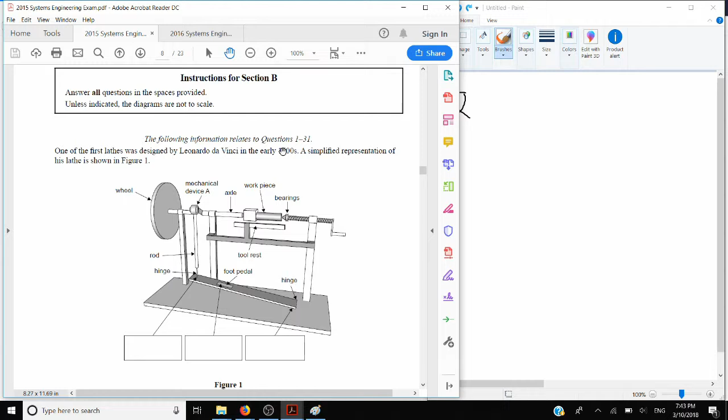It's pretty well labeled and it's reasonably clear. So what's it asking us? In the boxes provided in figure 1, label the effort, fulcrum, and the load on the foot pedal.

Okay, so here's our foot pedal. We've got the foot pedal connected to this crank, which is connected to our axle. A lathe, if you don't know, is a device for spinning a job, and you can use a tool to remove material from the job, that would be a piece of wood or a piece of metal or whatever you like.

So what do we got? We've got this hinge connected to a linkage connected to our crank. That's going to turn our axle. So that's going to be our load because that's the work we want done.

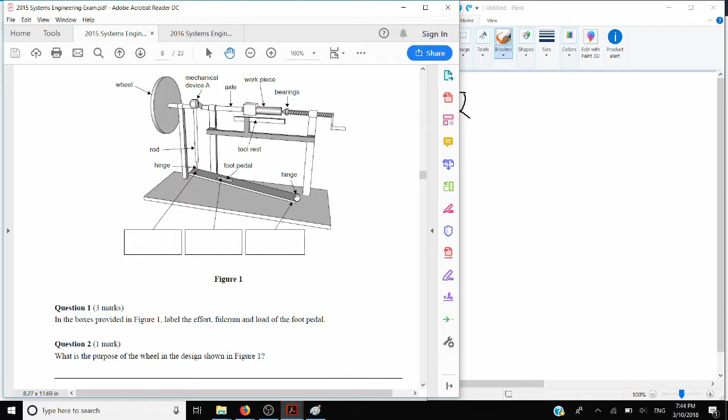I imagine this is where you put your foot, because it says foot pedal. So that's you putting in some power, that's our effort. And so what we've got left is the fulcrum, which is the point at which this, because it's a lever, is going to pivot.

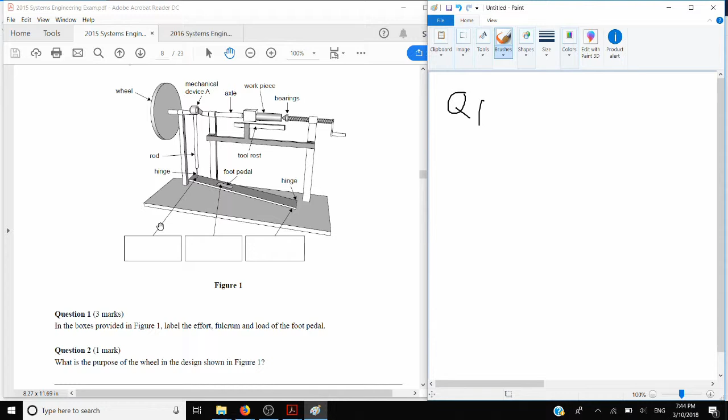So question 1, we have load, effort, fulcrum. Grand. Question 2.

What's the purpose of the wheel in the design shown in figure 1? Okay, so we've got this big wheel that is attached to our axle. And what is it for?

Well, if you've got a wheel and it weighs anything and it starts rotating, it's going to have some momentum and it's going to want to keep rotating. And we call that a flywheel. So if you said it's a flywheel, that would be fine. But if you didn't know it was a flywheel, if you said something like the wheel has momentum and helps keep the axle turning, that would be fine too, because think about this situation.

You can only put force into this crank and turn this axle on the downstroke. There's an upstroke where you can't put any force in unless you sort of hook your foot underneath the foot pedal and lift it up, which seems really silly. So you need the momentum of this big wheel to keep the thing turning. So any answer that encapsulates that is fine.

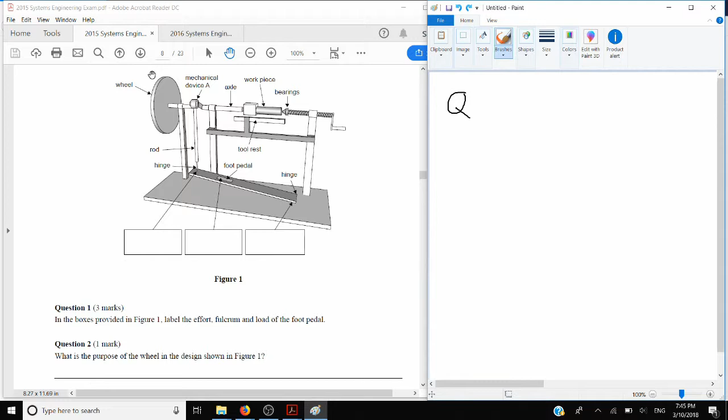Question 3, the type of motion for each of the following. Okay, so the wheel is rotational motion, and the foot pedal goes up and down and up and down, so that's oscillating. So that was question 3, rotational and oscillating.

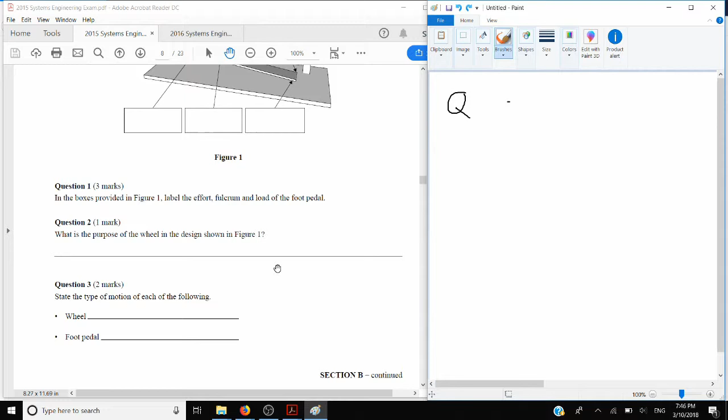Question 4, name the device labeled mechanical device A in figure 2. Okay, mechanical device A, it is connected to an axle, it comes off at an angle, and it helps you turn an axle, so it is a crank. It's got this linkage here that turns your oscillating motion into rotational motion. It's a crank. That was question 4, crank.

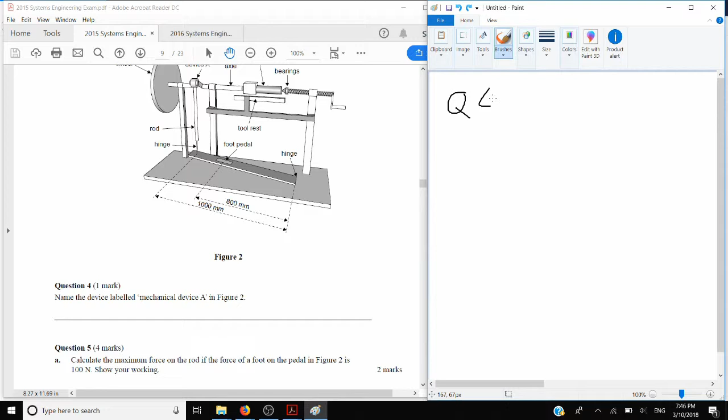Right, question 5. Calculate the maximum force on the rod if the force of a foot on the pedal in figure 2 is 100 newtons. Show your working.

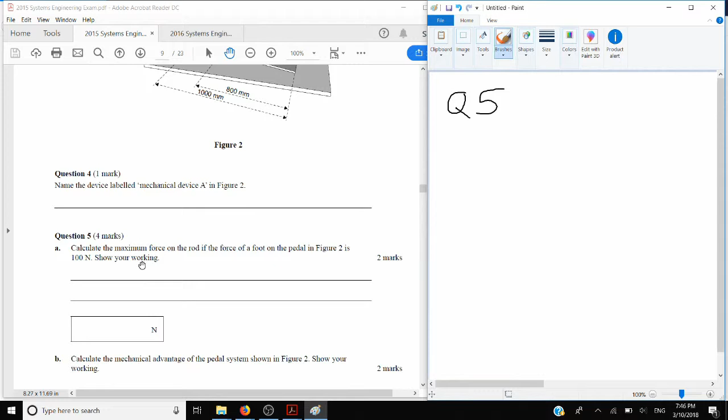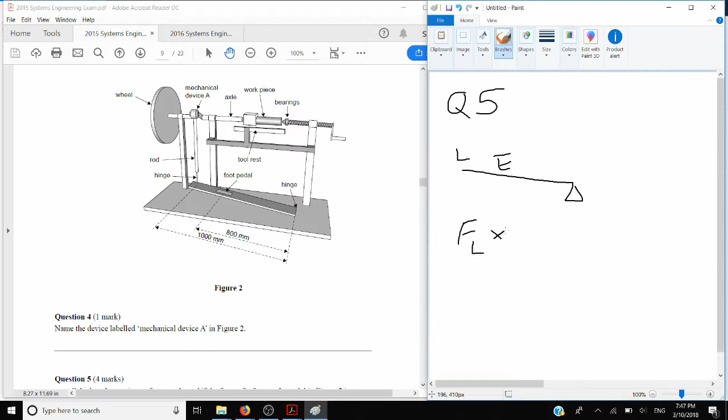Okay, I like this. So we've got a lever, and let's just draw out what's going on with our lever. So we've got our fulcrum there, we've got our load here, we've got our effort over here, and when we're working with a lever, we know that the force of our load times the distance to our load is equal to the force of our effort times the distance from our effort.

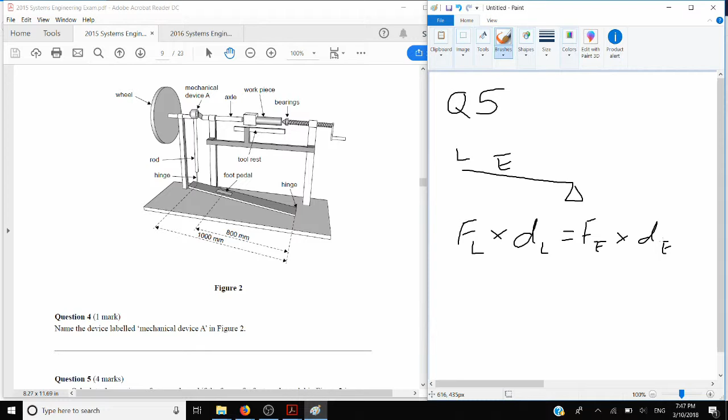So what do we have? We have the force of the effort is 100 newtons. We know the distance here is 800 millimeters from the fulcrum to the effort, we know that the distance from the fulcrum to the load is 1000 millimeters or a meter. So the only thing we don't know is the force of the load.

So we need to reorganize this equation so we have the force of the load on its own, and then we can solve it. So divide both sides by the distance to the load. You can cancel out the distance to the load, and then you can rewrite your equation as: force of the load equals force of the effort times distance to the effort over the distance to the load.

Now, one thing I'm always banging on about is anytime you're working with measurements, convert them to meters. It'll just make your life so much easier. So the force of the effort we know is 100 newtons. Multiply that by 800 millimeters, which is, let me rewrite this so that it's a little bit neater, 100 newtons times 800 millimeters rather is 0.8 meters.

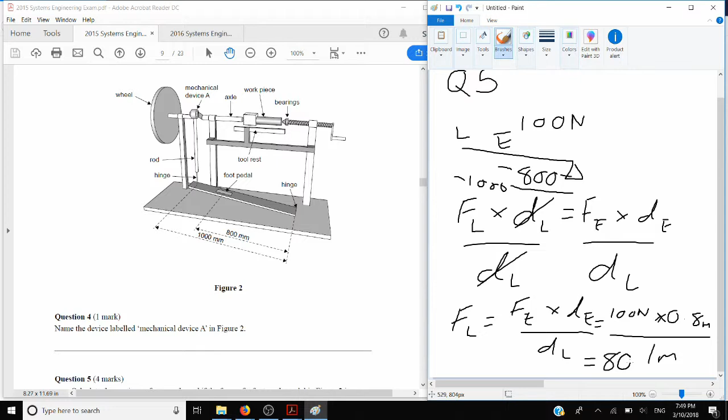And that gets divided by 1,000 millimeters, which is 1 meter. So that's super easy, right? Because anything you divide by 1 is just itself. So what's 100 newtons multiplied by 0.8? It is 80 newtons. And if you were to divide 80 newtons by 1, you would find it's still 80 newtons. So that's your answer for question 5 is 80 newtons.

Question 5b. Calculate the mechanical advantage of the pedal system shown in figure 2. Show your working. Okay, so let's draw this one out. We've got what is actually just a lever. So we've got a fulcrum. We've got our effort where our foot would go, and we have our load at the end where we're doing some work. And we've got some distances.

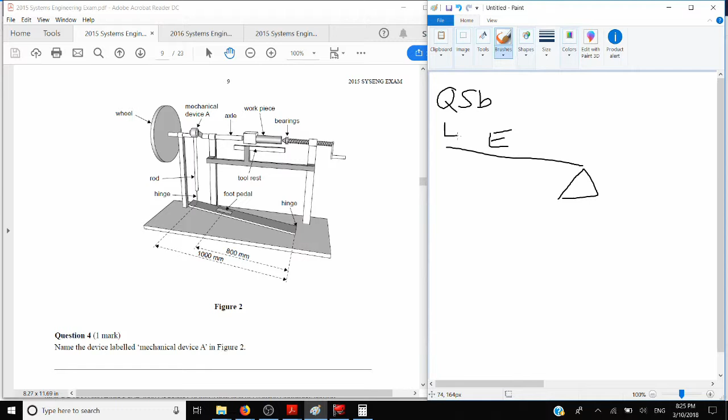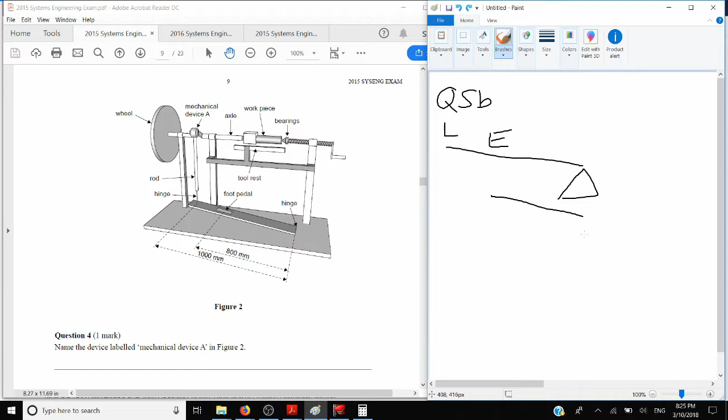So we know that from the fulcrum to the effort is 800 millimeters. And 800 millimeters, I always encourage you to work in meters. So 800 millimeters, well, there's 1,000 millimeters in a meter, so 800 millimeters is 0.8 meters. And the distance from our fulcrum to our load is 1,000 millimeters, which is just 1 meter.

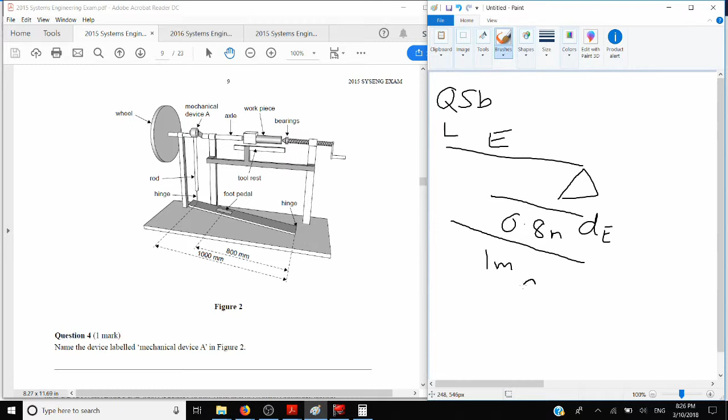So we know this is distance of our effort, this is distance of our load, and we also know force of our effort, which is our foot. Force of our effort is 100 newtons. And we don't know force of our load. But we can find that.

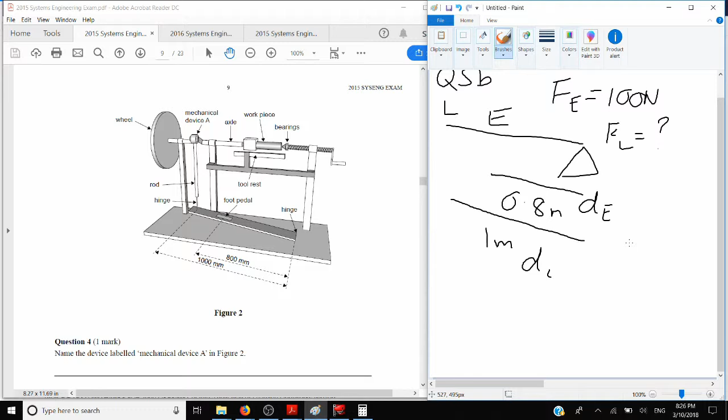And we can find that using our formula, because we know that the force of our load times the distance of our load is equal to the force of our effort multiplied by the distance of our effort. And we want to get the force of the load all on its own so we can find out what it is. So we divide both sides by the force of our load.

No, we don't. We divide them by the distance of our load. And we find that we can cancel out the distance of the load on that side, which gives us the equation. Running out of space, so I'm just going to move this along a little bit.

Force of our load is equal to force of our effort times distance of our effort over the distance of our load. And so now we can just put in our values. So we remember that the force of our effort is 100 newtons. The distance of our effort is 0.8 meters. And the distance of our load was 1 meter.

So what does that work out to? Well, 100 newtons multiplied by 0.8 is 80. And the neat part is that this is 80 over 1. So if you divide any number by 1, you get the number. So the answer to this question, the force of our load, is just 80 newtons. So that's question 5b is 80 newtons.

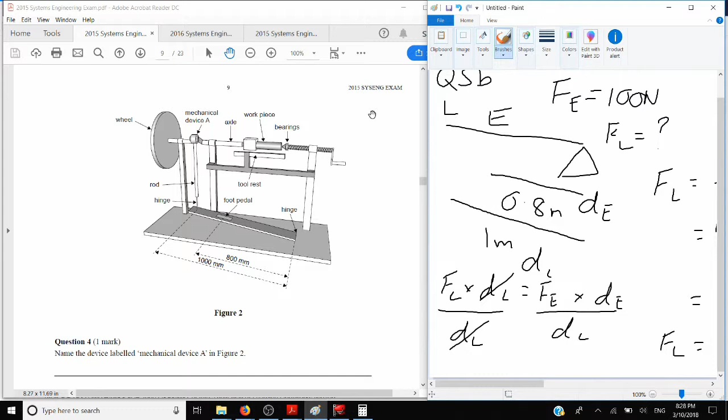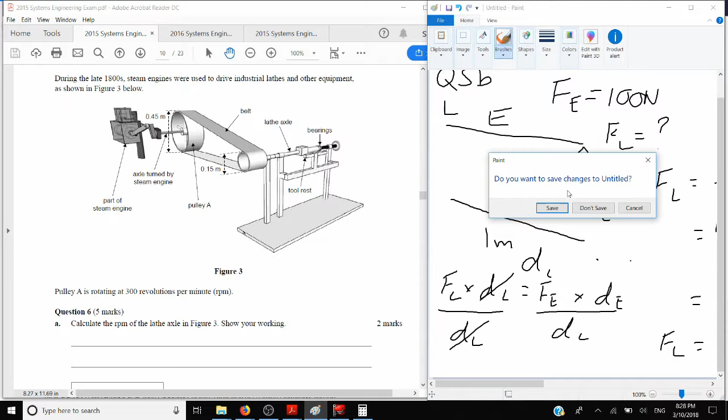Great. All right. New question. Question 6. So what have we got here? Late 1800s, steam engines were used to drive industrial lathes and other equipment. So what do we got? We've got a part of a steam engine anyway. We've got the axle being turned by a steam engine. We've got one wheel and a belt and a smaller wheel, and that's driving our lathe.

So this is a pulley arrangement. And if we're looking at this, we can see that we've got a large pulley over here and a smaller pulley over here. So without even going into the question and doing any sort of maths, we can just look at this and go, okay, so we've got a big pulley wheel here and a small pulley wheel here. That means that every time this rotates once, this is going to rotate more than once because it's much, much smaller. Think about how much the belt moves around the circumference of this pulley. The belt is moving the circumference of this pulley around this smaller pulley. So this one's going to have to rotate faster, which is a good bit of information to have in the back of your mind as you start answering the question, because that's going to help you check your answers and make sure that you're right.

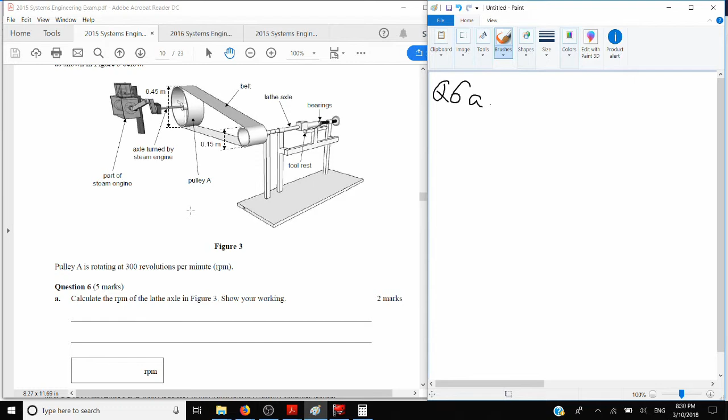So this is question 6a, the first part. And it says, calculate the RPM of the lathe axle in figure 3. Show your working. And it's telling you the pulley A is rotating 300 revolutions per minute, or RPM. Okay, so before we plug into the formula, let's just think about this, because a lot of the questions in these systems exams, you'd never actually need to look at the formula sheet.

You just need to think about the scenario. The diameter of pulley A is 0.45 meters, and the diameter of pulley B, the pulley being driven, is 0.15 meters.

Now, if I look at that, that looks like a pretty nice ratio. 0.15 times 2 is 0.3, so 0.15 times 3 would actually be 0.45. So pulley A is 3 times larger than pulley B.

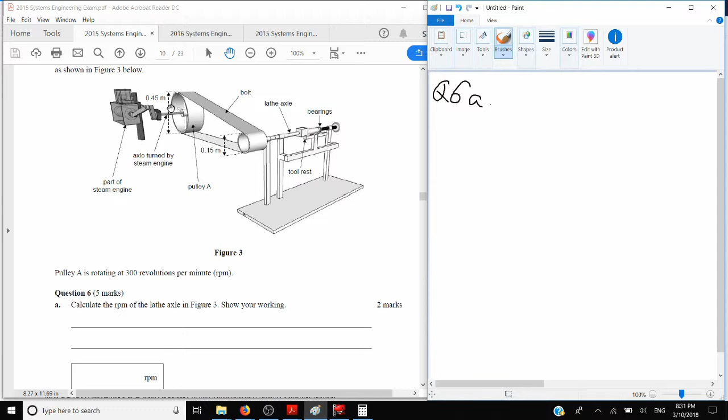Let's just do this: Pulley A is 3 times pulley B. Because the radius is proportional to the circumference, or the distance around the outside of the pulley, we can say the circumference of this pulley is 3 times the circumference of this pulley. So every time this pulley turns once, since it's the whole circumference moving that belt, it's moving this small pulley 3 times, because this one's 3 times larger than this one.

So if pulley A is spinning at 300 revolutions per minute, pulley B has to be spinning at 300 times 3, which equals 900 RPM. You don't even really need to do the maths at that point. You can just look at the situation and figure it out.

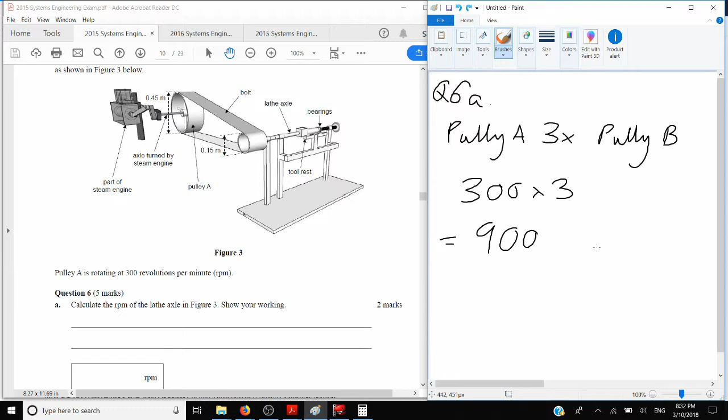But we will look at how to solve it using the formulas, because it's nice to show you working, and the question says show you working. So at least one of these marks is going to involve working. So let's look at the formula.

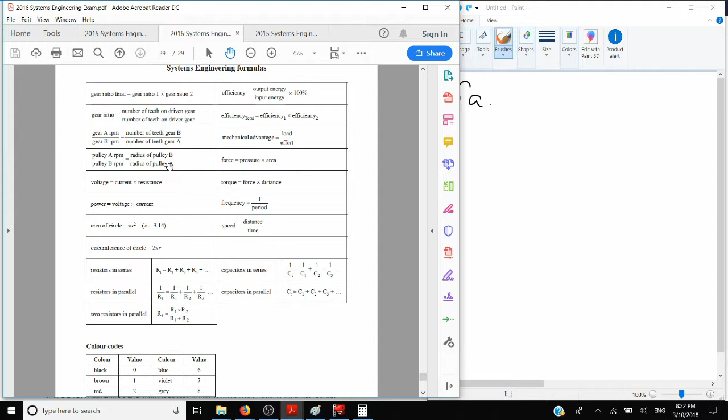We've got pulley A RPM divided by pulley B RPM equals radius of pulley B over the radius of pulley A. I'm going to shorten that when I write it out, so I'll write A RPM over B RPM equals radius of B divided by radius of A.

So here's our formula, here's our situation. Now, one thing you might notice straight away is that they haven't given you the radius, they've given you the diameter. That might mess you up. You can, of course, turn these into the radius. The radius is just half the diameter.

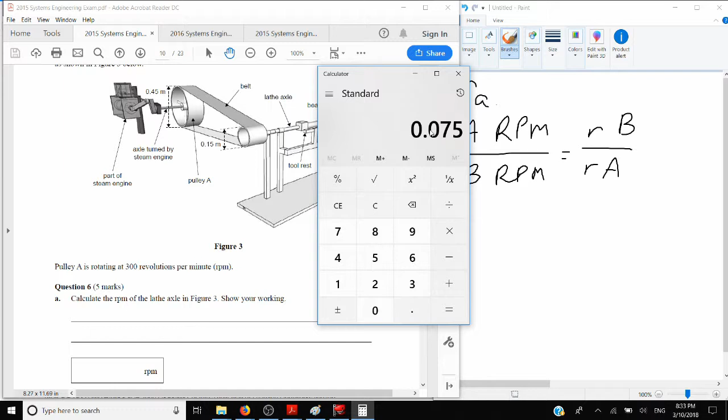So 0.45 divided by 2 is going to become 0.225. And 0.15 divided by 2... hold on, mental arithmetic's failing me... 0.15 divided by 2 equals 0.075. And you can use those in your formula.

If you use the diameter though, the formula will work just the same, and we've done that in class, because this is a ratio problem.

That's all. So I'm just going to plug in the diameter, and I might do some rearrangement while I'm here because I know the RPM of A, I know the radius of B, I know the radius of A. So let's think about what I can do with this problem.

Well, I want to find out the RPM of B, not the RPM of A. So it would be much easier for me in terms of my formula if I could get B on top. So what I can do is rearrange this, or flip both sides, to give me that formula.

So that's pretty good. Then what am I going to do? Well, let's just put in, and we know that the RPM of A is 300, and we know that I'm going to use the diameter.

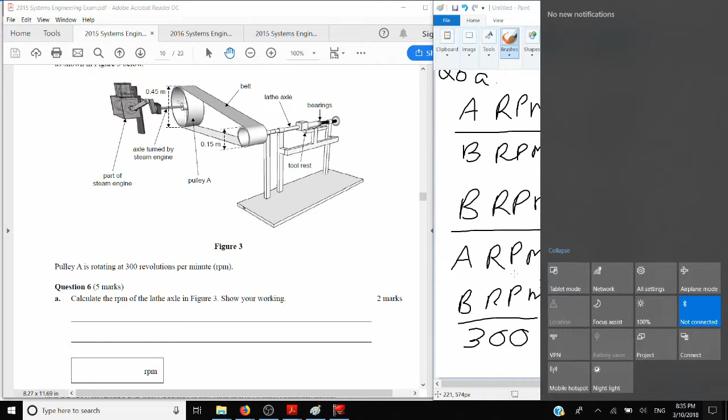Now I need to get the RPM of B on its own. So what can I do? I could multiply both sides by 300, and I haven't really left myself enough space to do this. So these cancel out, and now I have RPM of B on its own, and I've got this sum over here.

You could multiply 0.45 times 300 and then divide it all by 0.15, or you could divide 0.45 by 0.15 and then multiply by 300. That's the one I'm going to show you here. So 0.45 divided by 0.15 is 3, times 300 equals 900.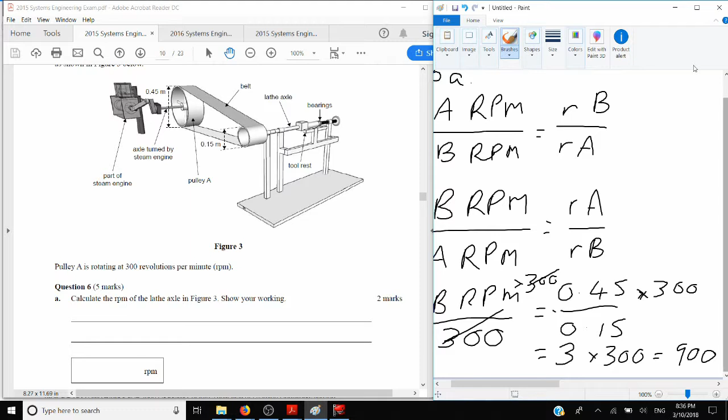So the answer we just got to with this formula is 900 RPM, which is exactly the same thing that we got when we just thought through the question and looked at the ratio, the difference in size and the proportion of these two pulleys.

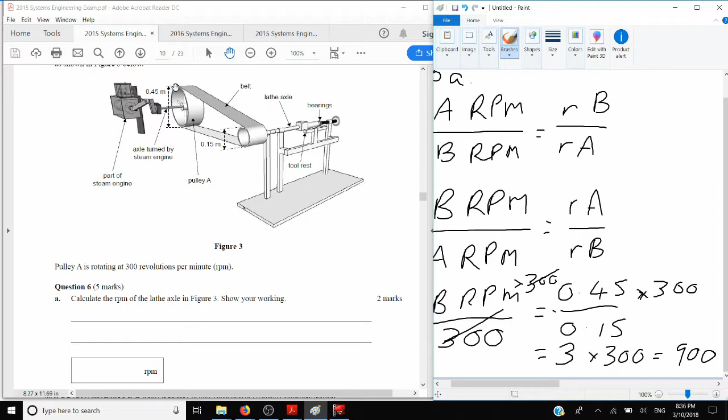Question 6b. Oh sorry, that was 6a we just did. Now we're doing 6c: calculate the speed of the belt in figure 3.

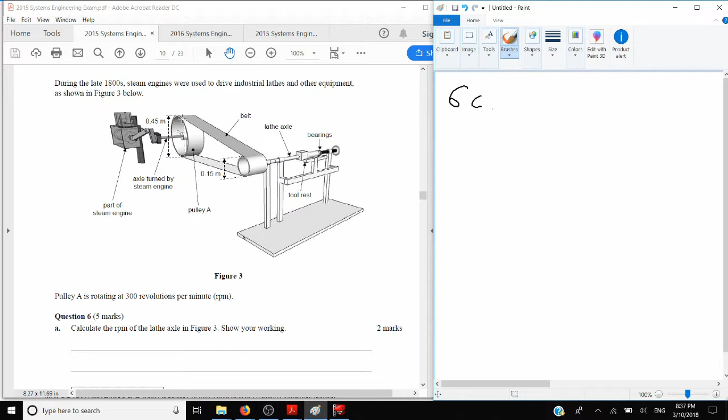Show your working. Well, what do we know? We want to know the speed of the belt. So in other words, if we were timing how long this belt took to go from here, how quick is it moving? So how do we figure that out? Well, let me just draw this out.

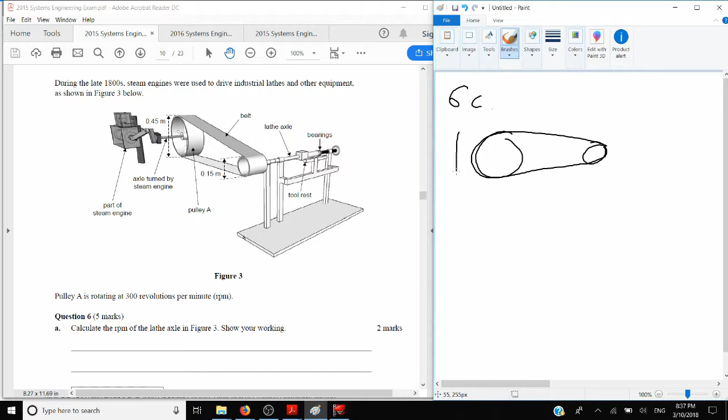We know that the diameter of this pulley is 0.45 meters, and we know that it's spinning at 300 RPM, or revolutions per minute.

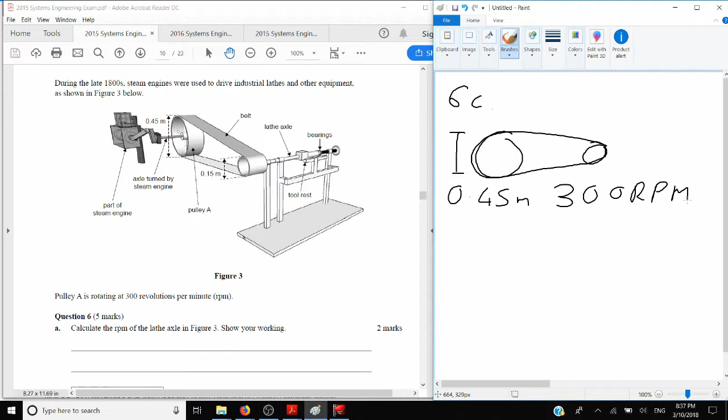So what else do we know? Well, we know that every time this pulley rotates, makes one rotation or one revolution, the belt has to move the distance of that pulley. So if we know the circumference of the pulley, we can help ourselves out there. There's a formula for circumference on your formula sheet, not an area circle.

Circumference of a circle is 2 pi radius. So that's the diameter — what's our radius? Our radius is half of our diameter, which is 0.225 meters. So: 2 pi radius, 2 times pi times 0.225.

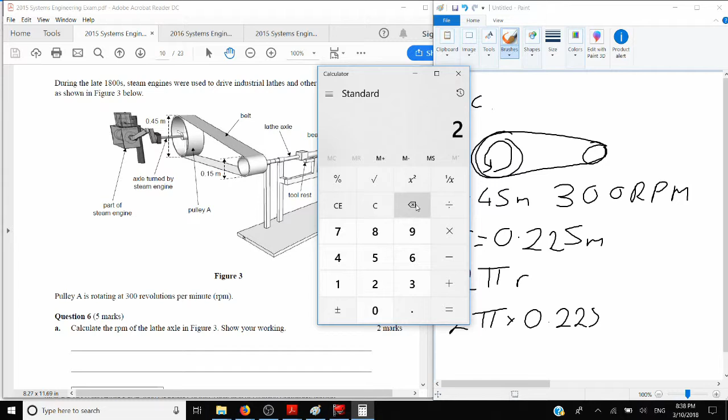I've closed my calculator. Where is pi on my calculator? There we go. 2 times pi times 0.225 equals... let's just round that down, so we're going to say it's 1.42 meters.

So every time this belt spins, every time our pulley spins, our belt has to travel the circumference of that pulley, which is 1.42 meters. Now usually speed is given in meters per second. So if we were just to times this by 300, because it's spinning 300 times a minute, that would give us the answer in meters per minute, and we don't want that — we want meters per second.

So think about it: if this is making 300 rotations every minute, then it's making fewer rotations every second, because there's 60 seconds in a minute. So if we just divide 300 by 60, we get 5, which is 5 revolutions per second.

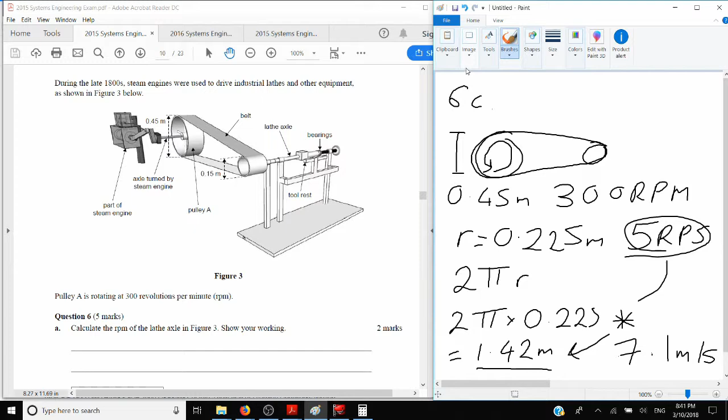What else we got? Oh, and they even tell you that — they tell you they want it in meters per second. They're very clear, so make sure you look at these little things, make sure you look at the units. In fact, sorry, I missed an entire question: convert 300 RPM to revolutions per second. So they're stepping you through the process in these questions. I should look at my questions a little more closely.

All right, we're on to something different. Question 7: Given that the steam engine always rotates in the same direction, how could a belt and pulley system be modified to reverse the direction of the lathe axle? So you want to change the direction of a belt and pulley system.

There's actually more than one way to do this, but the simplest one is to do a figure 8 with your belt, because this way, if this pulley is rotating this way, the other pulley will be rotating in the opposite direction. So you could write that you make the belt into a figure 8 arrangement, or put the belt on in a figure 8 pattern, or cross them. Even crossing the belt over would probably be an acceptable answer.

Question 8: Give one essential piece of personal safety equipment that must be used when operating a lathe. Okay, so you're operating a lathe, it's rotating a piece of work, a job, and you are removing material from that job. Straight away I think to myself, what should I be wearing? Probably some safety glasses, right? So that when the chips or shavings of this job are flying up in the air, they're not getting in my eyes.

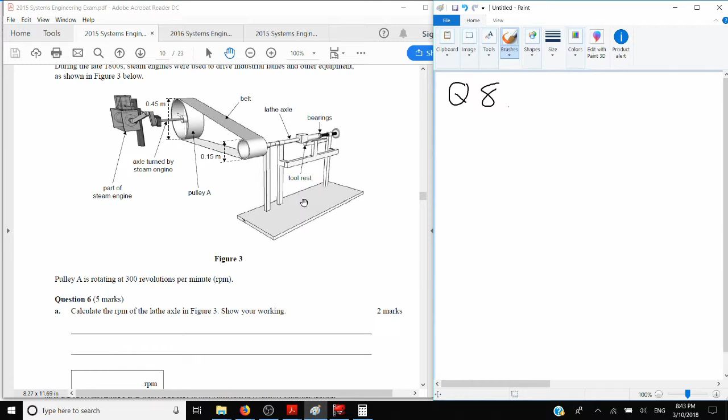What else might you wear? I don't know — you might wear work boots to protect your feet. You might wear a shop apron to protect your clothes, although again, is that safety or just protecting your clothes? One thing you want to step away from with machinery like this is gloves. If you're using gloves with a machine, you lose dexterity and feeling in your fingers, and gloves are also really good at being caught in machinery and pulled into it.

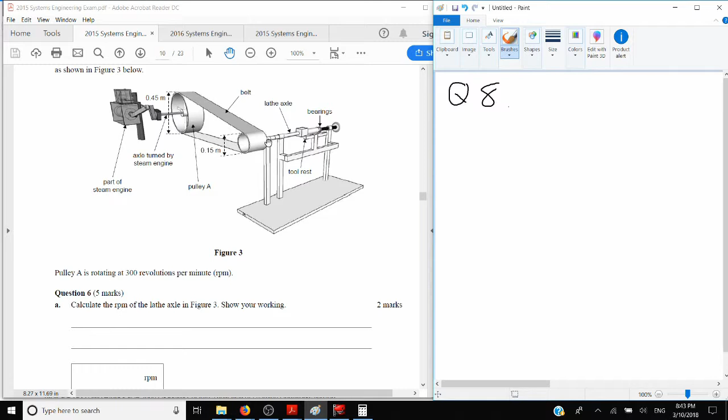So be very careful when you're asked about personal safety equipment or personal protective equipment. Think about whether gloves would actually be appropriate in that scenario, or whether they would actually put you in more danger. Anyway, that's question 8.

Question 9. In a different setup of the steam engine, a gearbox with a ratio of 1 to 4 is used. The question asks us to draw and label the components of the gearbox, given that the steam engine axle and the lathe axle rotate in the same direction. Use either the end view or top view diagram provided, and only spur gears from the given range of sizes may be used. Okay, let's unpack this.

They want a gearbox with a gear ratio of 1 to 4. This means they want the driving gear, connected to the steam engine, to rotate once, and for every time it rotates once, they want the output or driven gear to rotate 4 times. So straight away you should be thinking big gear, small gear, and the big gear would be 4 times the size of the small gear.

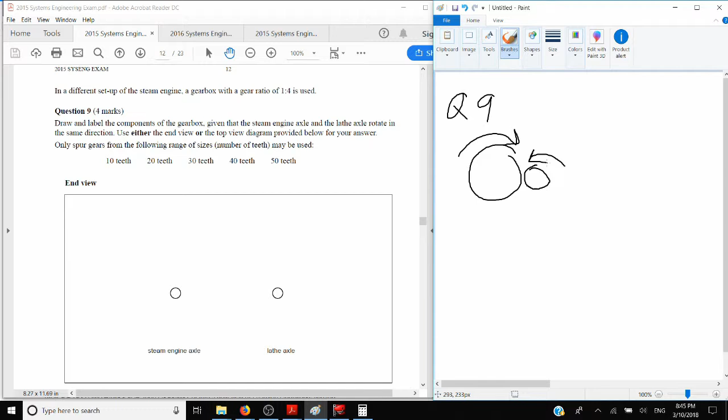Now what else do we need to think about? They're saying the steam engine axle and the lathe axle rotate in the same direction. So not only do they want a 1 to 4 ratio, they want this gear and this gear to rotate in the same direction. If you mesh two gears, imagine they're meshing, if this one spins clockwise, this one will spin counterclockwise. So that's no good.

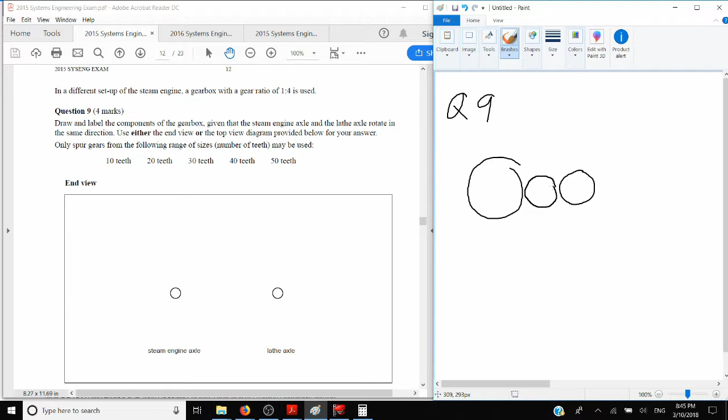We need something that will make them spin in the same direction. The way we do that is by adding an idler gear in the middle. That way, if this spins clockwise, the idler gear will spin counterclockwise, but the output gear, the one we're interested in, will spin clockwise, in the same direction as the driver gear.

Now what do we need to do? We know we need a 1 to 4 ratio, so this gear needs to be 4 times that gear. So what can we suggest? We could have 40 teeth here and 10 teeth over here. It actually doesn't matter what size our idler gear is, because it doesn't affect the relationship between these two. If I use another 40-tooth gear, the ratio is still 4 to 1. If I use a 10-tooth gear, the ratio is still 4 to 1. So that really doesn't matter.

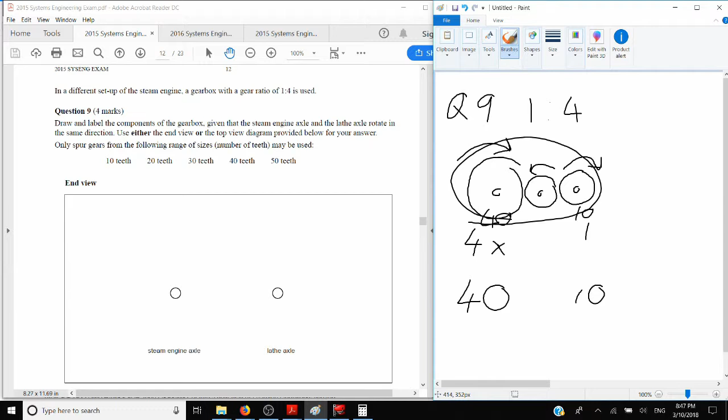So what you need to draw is something that looks like this. Maybe draw the axles in there too, that'd be nice, and you need to label them: 40, 10, and pick whichever idler gear size you like. I like 10, so I'll use the 10. That's my gear arrangement. I'd need to draw another axle in here, or you could do that over here. I really don't like drawing gears from above, so I'd choose this option. If you're drawing gears from above, you'd draw them here, here, and another gear in the middle, and again you'd be labeling those. Great.

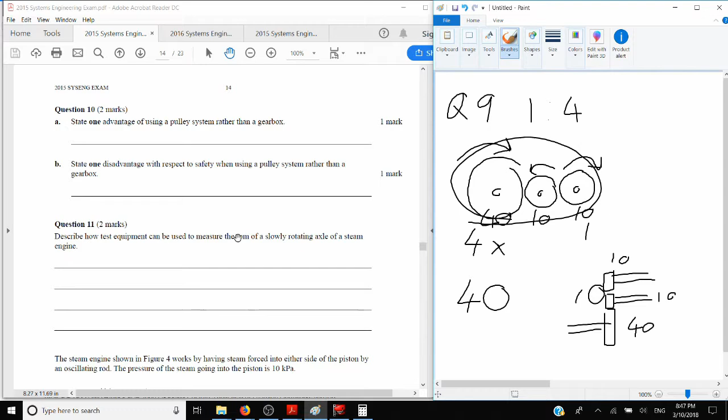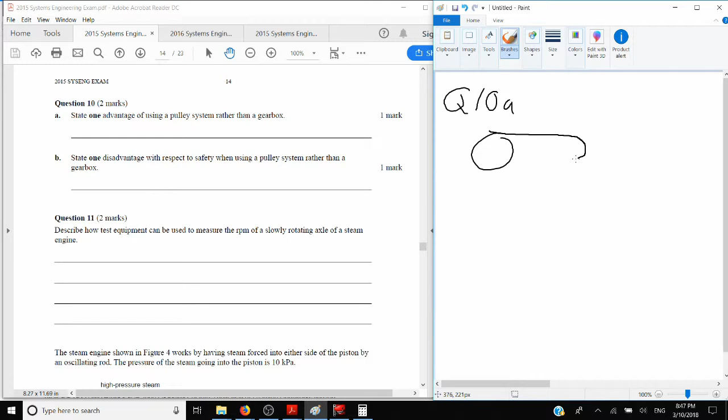Question 10. Part A: one advantage of using a pulley system rather than the gearbox. Okay, so, advantages of pulleys: pulleys are able to slip a little bit.

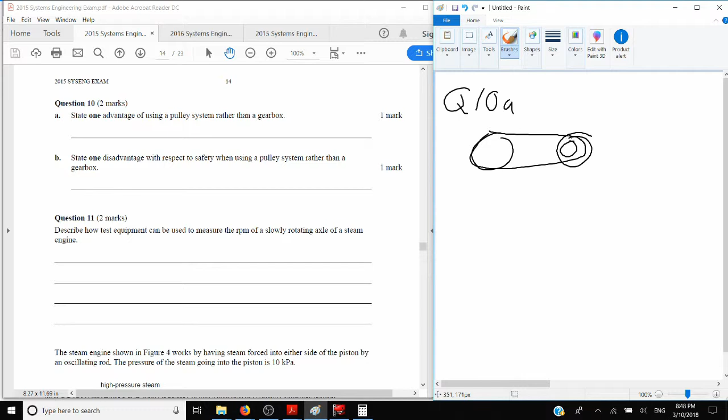For example, if your lathe is coupled to this output pulley, and something gets stuck in your lathe or it jams up, imagine there's something rotating here and it gets jammed, this can slip. That might be desirable because it might prevent your motor, the thing driving this gear, from getting damaged. That would be an advantage of a pulley system.

Another advantage of a pulley system is that the driver and the driven will spin in the same direction without an idler, which wasn't the case with our gearbox. Another advantage might be that in general, pulleys are nice and quiet. That might be important, it might not, but it's an advantage. So that's part A.

10B: one disadvantage with respect to safety when using a pulley system rather than a gearbox. You've got this spinning laminated fiber belt connected to these two wheels. What are some safety problems with this? Well, the first one I'd think of is that belts can fail, and when a belt fails, you've got this flailing piece of rubber-impregnated fabric or wire-impregnated rubber flailing about, which can cause injury.

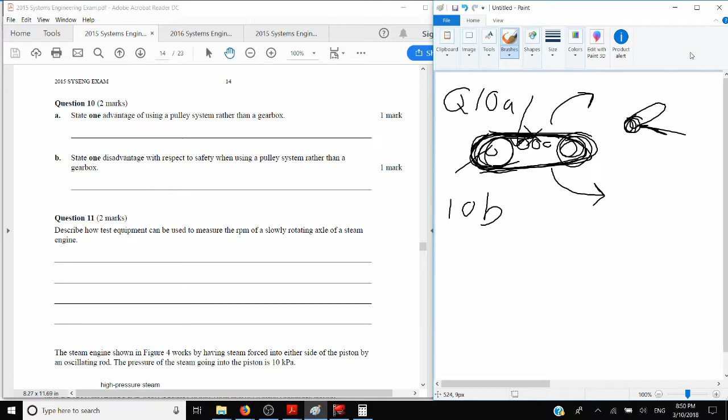Question 11. How can test equipment be used to measure the RPM of a slowly rotating axle of a steam engine? You could think of many scenarios where you might be able to measure the RPM, or how many times per minute an axle rotates.

Let's say that's a wheel attached to the axle, or there'll be a wheel attached to the axle anyway - otherwise why would you have an axle? I could put a mark, maybe with chalk, in one spot on that wheel, then start a stopwatch when it is at the top, and count how many times that mark rotates and comes back to its original position every minute. That would give me a really good idea of the RPM of that slowly rotating axle.

Right, great answer.

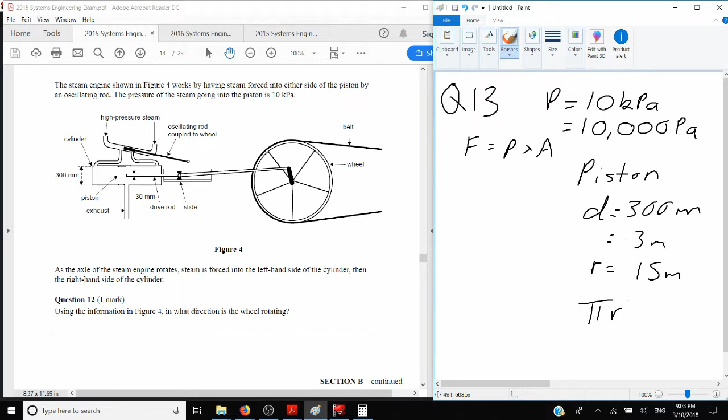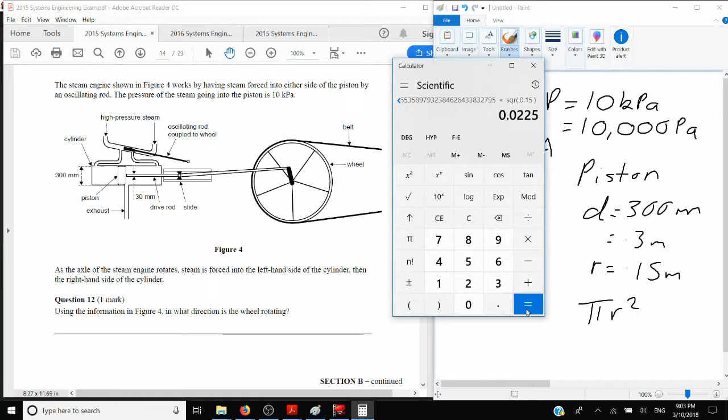Pi times 0.15 squared equals 0.07 meters squared. Okay, so there's our area. So let's just punch that into our equation. We've got 10,000 times 0.07 equals 700 newtons.

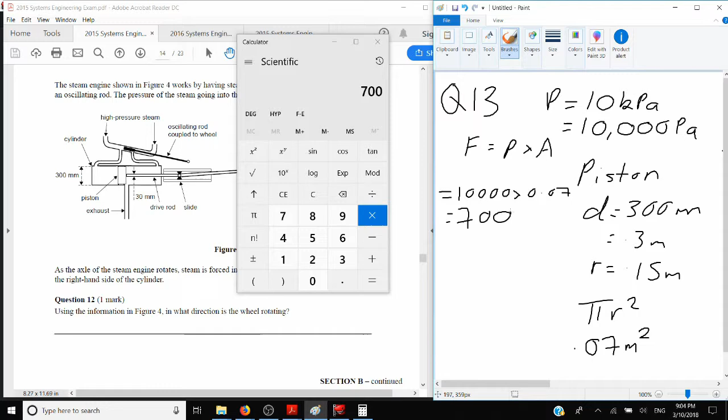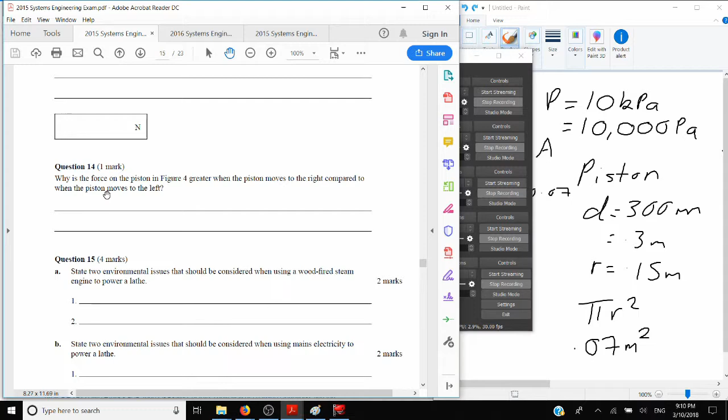Okay, so question 14. Why is the force on the piston in figure 4 greater when the piston moves to the right compared to when the piston moves to the left? Let's have a look at that picture. I've left all this up here to help explain. So when our piston moves to the right, steam's coming through here, here's our piston face, moving over here, it's saying that the force is greater than when the steam comes through here and pushes the piston to the left. Now, why is that?

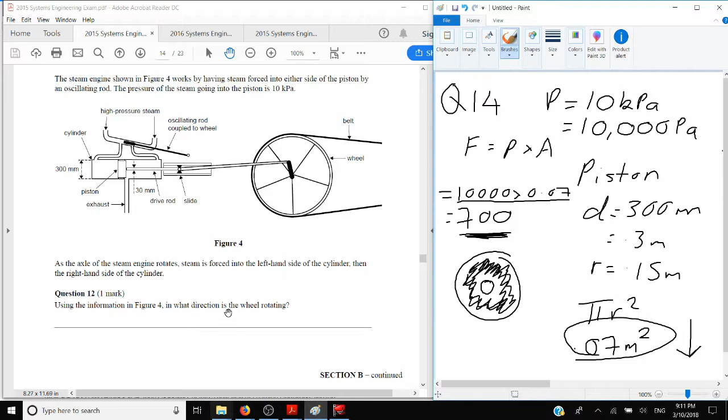Well, it's because this side of the piston face, the side that gets pushed when it moves to the left, has this drive rod, this 30 millimeter drive rod through the center. So if you were to look at the face of that side of the piston, you would see something that looks like this. There's the face of the piston, and here's this drive rod. And what has that done? Well, it's reduced the area of the piston face. Now, if you reduce the area, so this was our area here, if this is less, then when you put it into this equation here, you're going to get a smaller amount of force. If there's less to push on, you're going to experience less force. So that's the answer to question 14. Might be something like the drive rod reduces the surface area of the piston, would be a great answer.

All right, let's move on to question 15. 15A. State 2 environmental issues that should be considered when using a wood-fired steam engine to power a lathe. Okay, so 2 environmental issues. One, you're burning wood, that's going to create a lot of smoke. All wood smoke is carcinogenic. So you could write consider the smoke produced, or consider the smoke pollution, or something like that. Issue number 2, what else? You could consider, is the wood from a sustainable source, or a renewable source even. Because if it's not, then what we're really doing is cutting down a bunch of very old trees that can't be replenished within our lifetime, or a single lifetime, to power this steam engine. So those are two environmental issues.

Right, two environmental issues that should be considered when using mains electricity to power a lathe. Number one could be how the electricity is being generated. Is the electricity being generated from renewable sources? So, solar, geothermal, wind. Because if it's not, well, in Australia at least, it's probably from a coal or gas-fired power plant, and they produce carbon dioxide emissions. So you could write something like the source of the electricity generation, e.g. generating greenhouse gases.